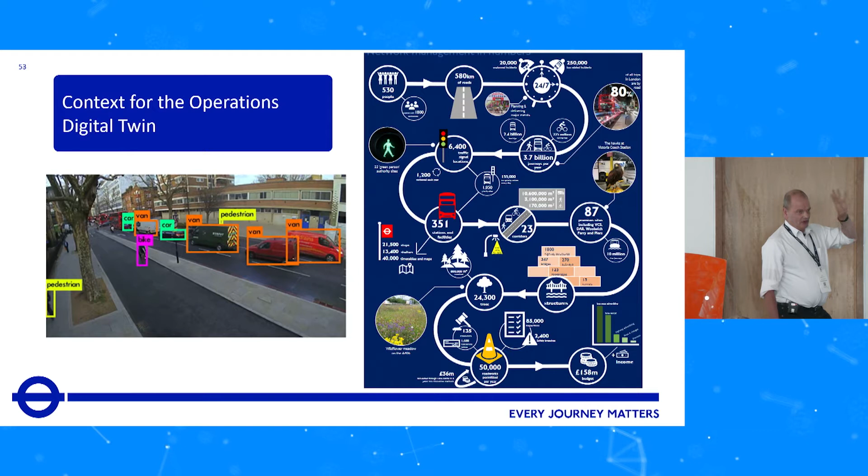Everything from managing every bit of the assets, to running the bus service on it, to managing 50,000 roadworks a year, to managing 3.7 billion road trips by different modes. And what we do in Transport for London in Surface is we manage every single element of that, from managing the 6,400 traffic light signals, which are fully automated and regulate most of the activity on the network, right through to managing all the assets and everything that goes into making the roads work.

But there are specific challenges about London's roads that make them truly a complex system. On the left-hand side, we have data. We have poor quality data. Like I said, when I started 18 years ago, there was nothing. In some areas, like monitoring freight movements and pedestrian movements, we still don't have good data. We have poor spatial and temporal coverage. We have a lack of certain types of data. We have poor innovation by suppliers in terms of sensors and new data.

All of these digital AI cameras are brand new. We've only been trialing them for 2 or 3 years. I now have about 150 of them on the network. And there's this whole idea that we understand our outcomes, but we don't necessarily understand what's driving them. How do I bring that information together? That's what's really important. But there are attributes of the network that make this complicated.

London's roads are open. It's not like running the underground or a bus service where you have a schedule or a fixed route. We don't manage demand per se. It's an open network. The road layout is very atypical. Every single road's different in terms of its characteristics, its physical entities, how wide it is, how much capacity it has. And there are constant dynamic changes in the network design and layout. I've estimated that 10% of London's roads have some facet of change associated with them. In other words, either there's some element of redesign, resurfacing, or some elements of control are changed on that part of the network.

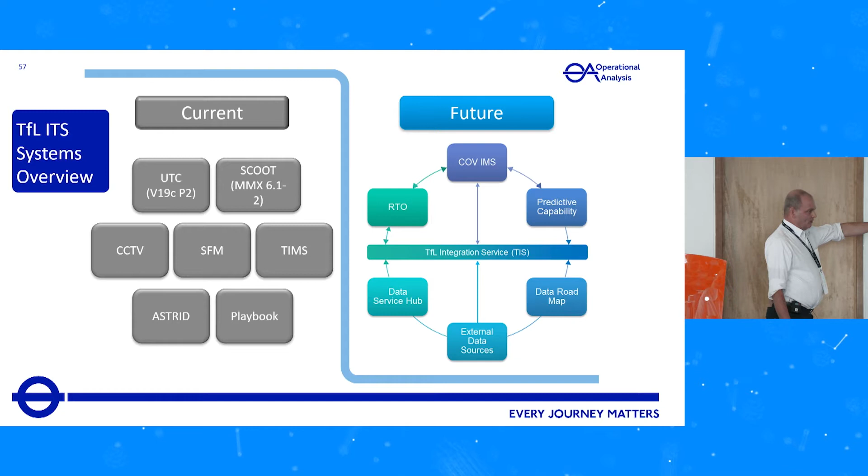We're replacing all the signal system, which is what RTO is, real-time optimizer. That signal system now will be truly multimodal. We are producing a common operational view of the road network. This is the decision support system the controllers will use for their information to manage the network. And then we're building a predictive capability module, which will take a snapshot of the road network, run it against traffic models in faster than real time, and come up with mitigation measures.

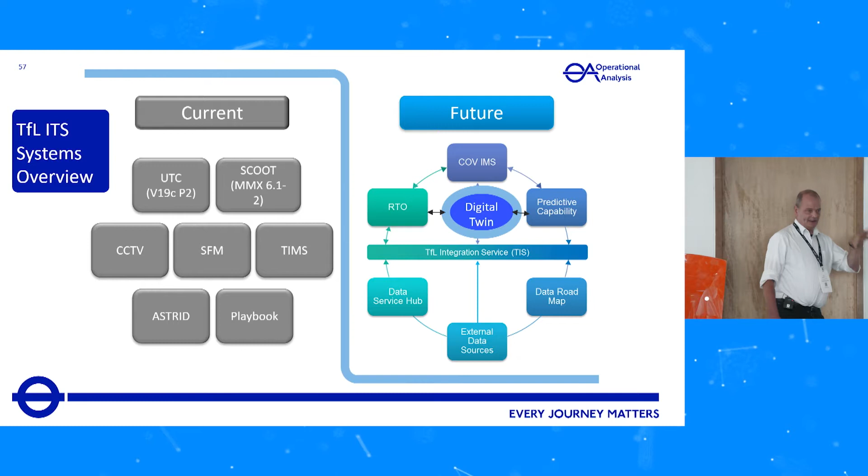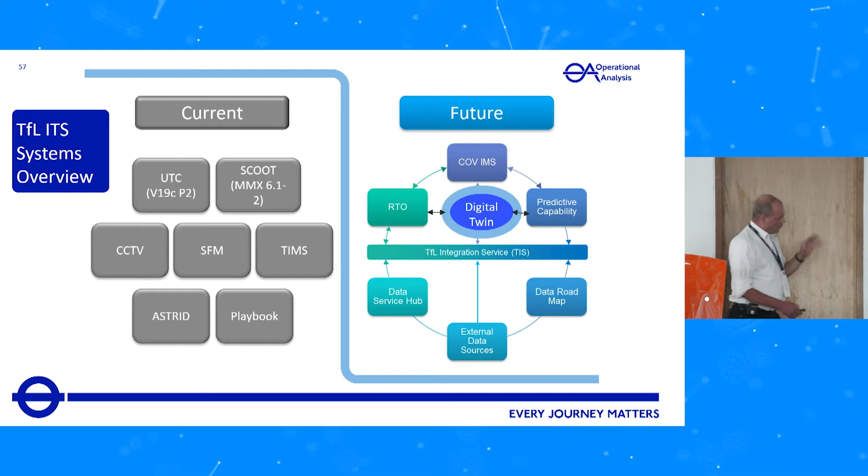So that's our road map, but what underpins it? You need a coherent single set of all the data to tell that one vision of the truth. And that is the digital twin that I'm about to demonstrate. This proof of concept will become the operating model, the decision support system for our technology program.

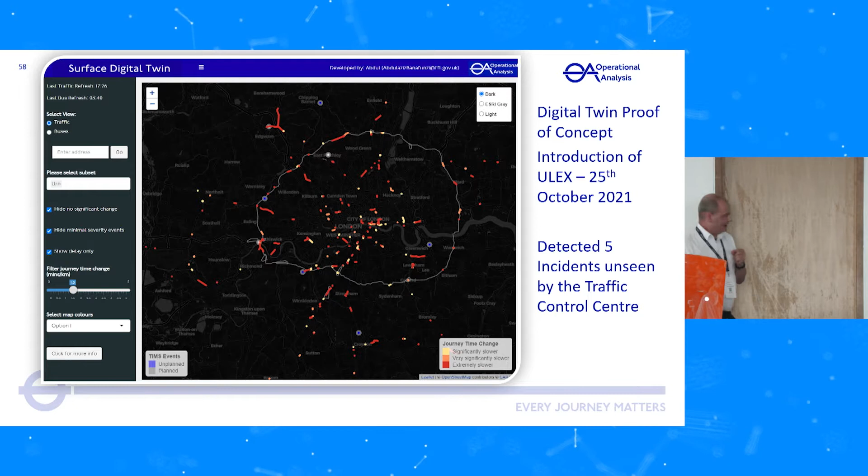So this is a snapshot of the digital twin that I built. I'm going to take you through a video of this, but this single slide shows it was utilized in anger when we had the implementation of the ultra low emission zone inside the outer ring road. This went live on October 25th last year, and I built this tool for the signal engineers to understand when there was an incident on the network.

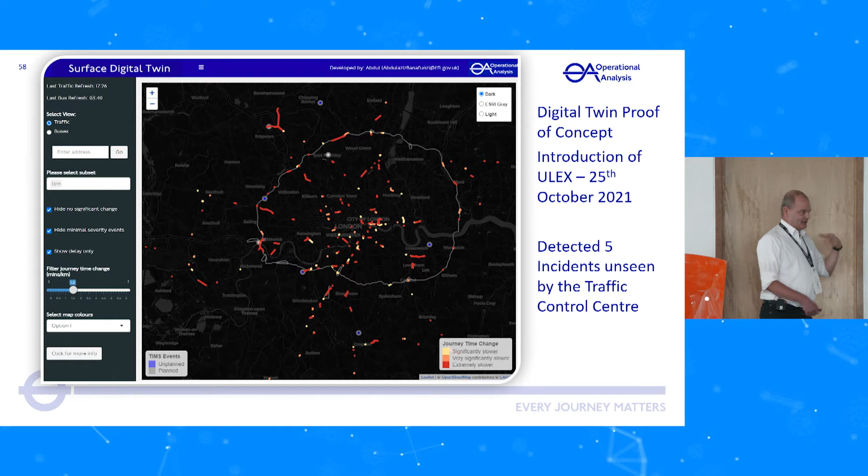You can't quite see here, but there are some defined areas like Chalker's Corner they were very concerned about. Some other areas specifically, if we had overlaps in those areas, they would act on this information instantaneously and switch the signals and switch the signal plans as this information came to light in literally minutes.

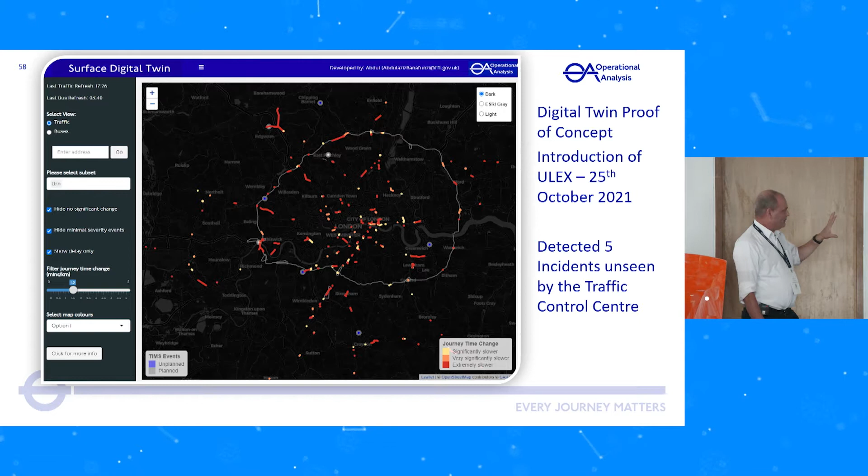The good thing about this is the proof of concept detected 5 incidents on that particular morning that the control center didn't pick up. They use eyes on the network, CCTV, and typically there's a 15-minute lag in detecting incidents on the road network, and we did this in minutes.

So I'm just going to play a video here, which I'm going to talk over. So this is the digital twin. We can see up here in the top left, it gives you information about its refresh.

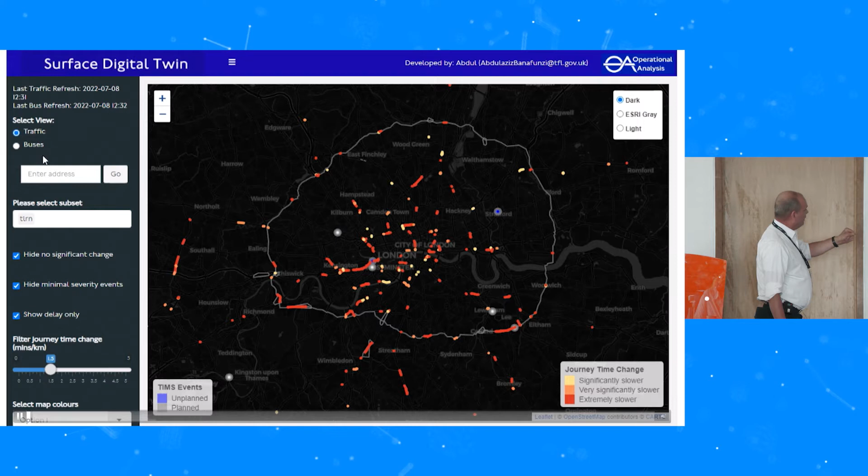At the moment, what we're doing is bringing through journey time information both for traffic and buses. This is basically relative to a baseline just before the ULEZ zone went live, telling me where there is disruption on the road network. The red means something in terms of the amount of delay I'm seeing relative to before it went live. I can drill into different areas of this tool.

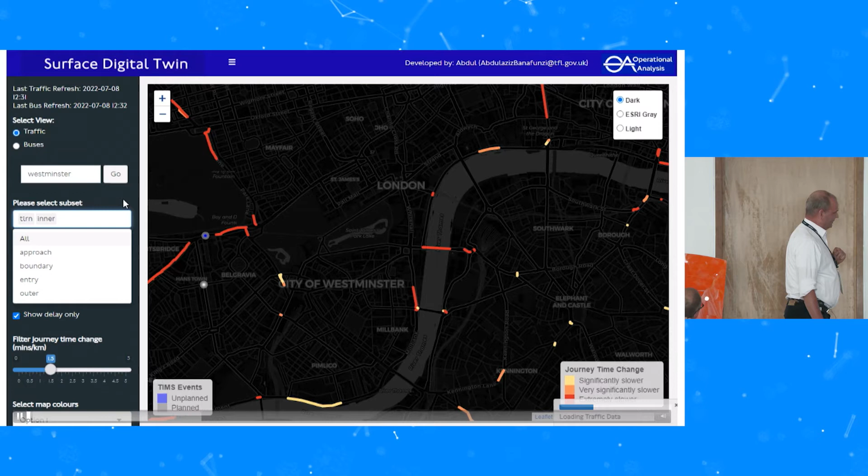Here I'm looking at Westminster. So we have the ability to focus in. We're just taking a cut of the data for the inner zone. You can see the blue bar at the bottom is telling me that data is refreshing as I'm pulling this through. And then we have lots of contextual information.

I can run over this link and I can see in real time what's happening there in terms of absolute change, the difference in journey time, giving me some absolute sense of where I'm at in the network and whether I need to take an action.

So we've got here what my journey time deviation is, sort of all the contextual information the signal engineer needs in real time. And one of the things we're effectively doing is constantly comparing buses relative to general traffic, because our job here is to protect bus services.

And here I can see the route numbers, and differently here, I can see their deviation to the actual schedule time in real time. How slow is that relative to when the bus said it would be here?

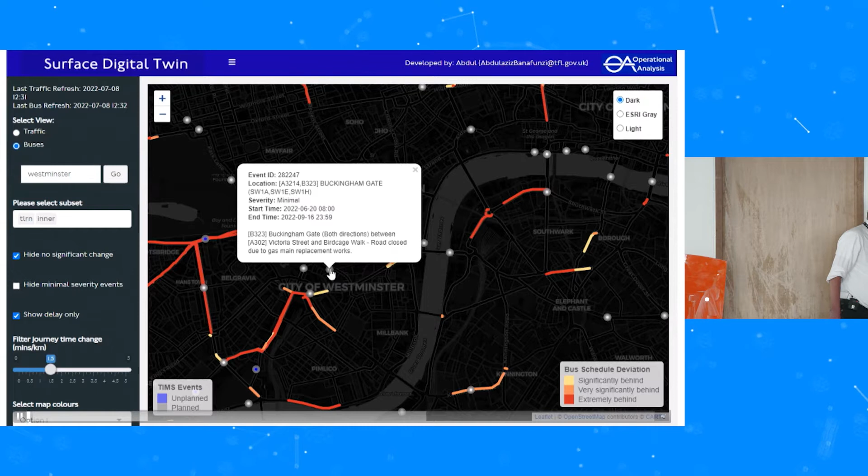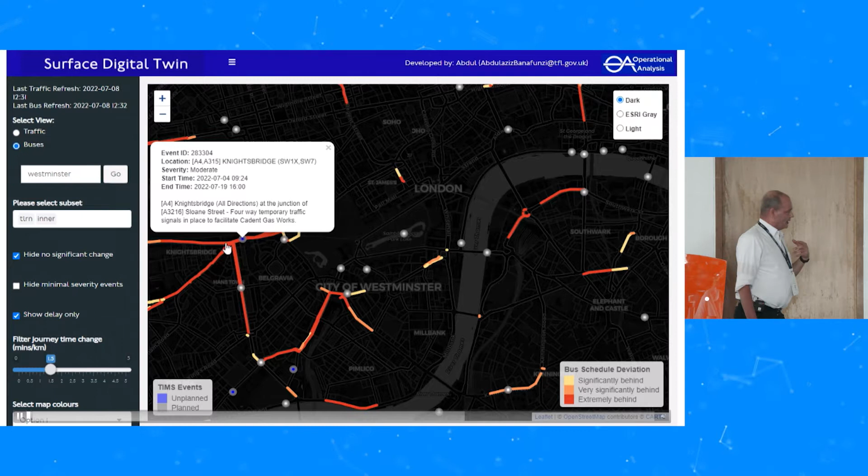I can bring up information on what's being recorded live in the control center. I have contextual information on all the incidents. I can see here that we have gas replacement works on the go. Here we have 4-way traffic signals operating at that moment in time. So I can begin to bring up lots and lots of contextual information.

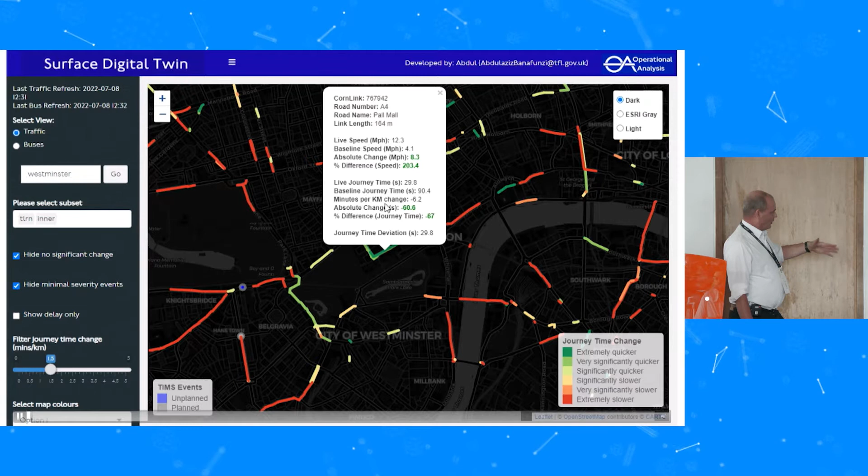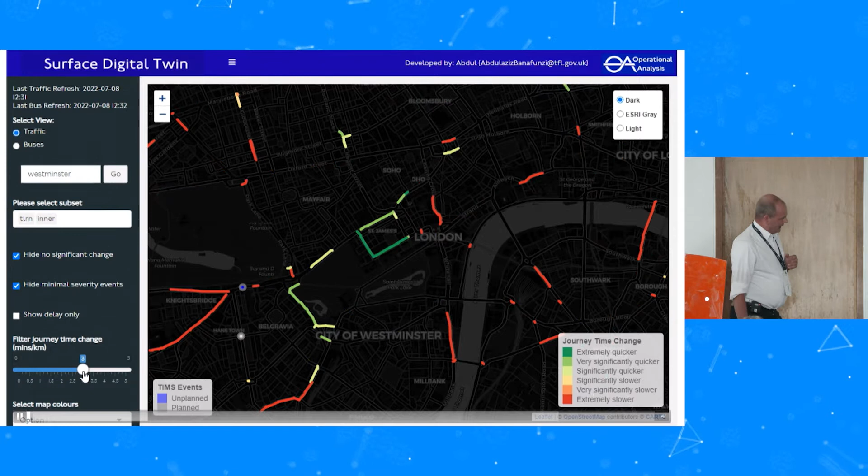I can also see the flip side, the very delayed part of the network. I can actually see where I've got spare capacity. So all I've done here is, instead of focusing on where I've got congestion, I'm actually focusing on where the journey times are flowing quite freely. Is there something here that I might use in terms of being able to reroute traffic? Do I have some parts of the road that are more free-flowing, for example?

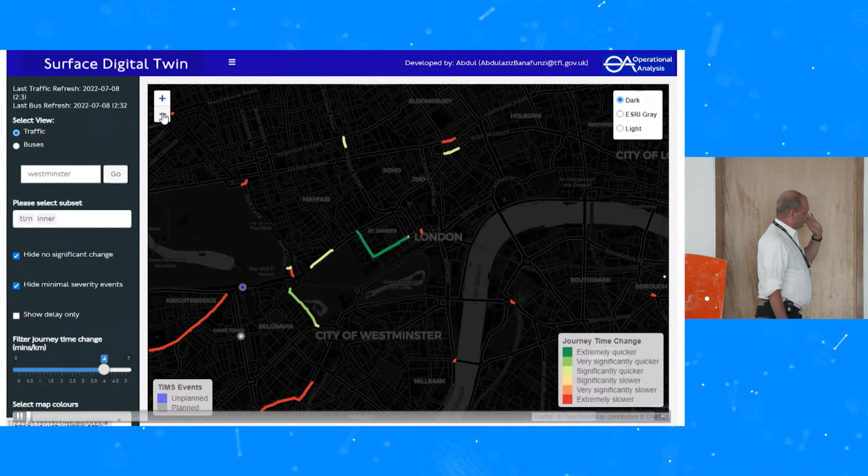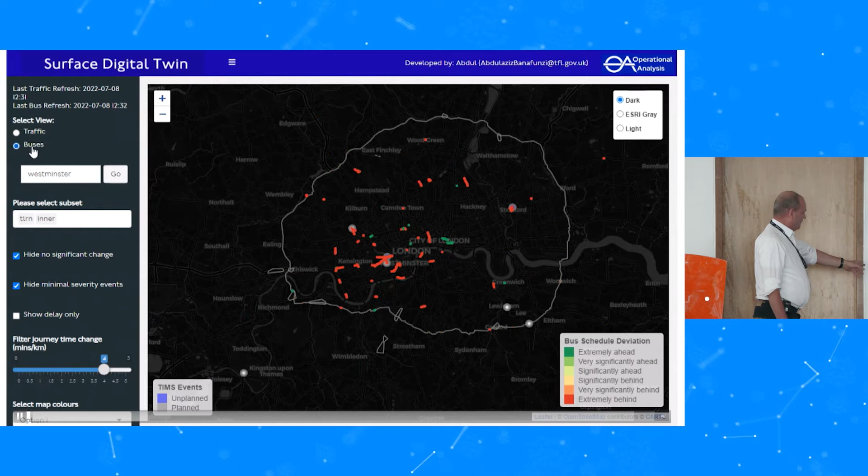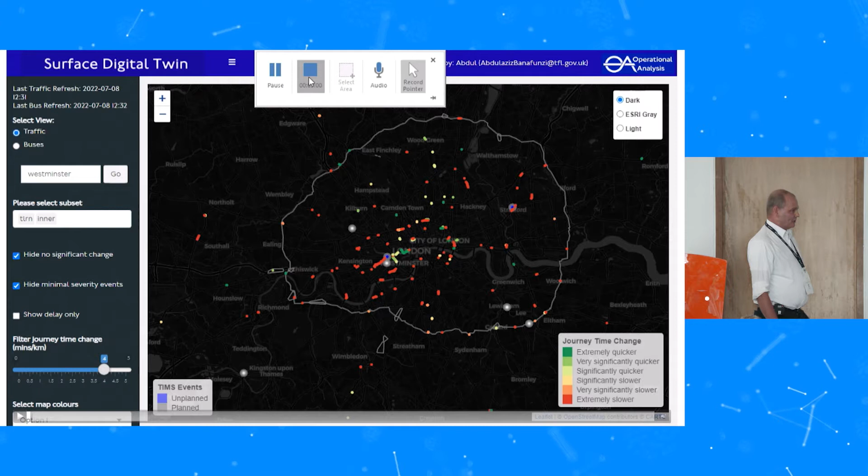The way this works in principle is it works on the basis of thresholds. Basically, there's a percentage difference on the amount of journey time in these links relative to the baseline. But one of the things I can do is filter this journey time by using and changing this threshold at the bottom. What that does is allow the operator to focus on the bits that are absolutely critical, to get a full overview of the journey times on the network, but also to focus on a threshold of what's important to manage.

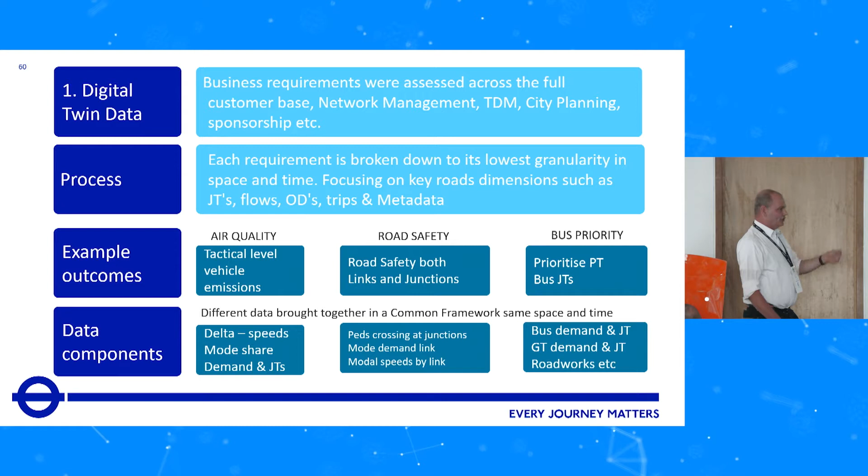So for example, concentrating on the one under air quality, my boss wants to know emissions - how much emissions are coming out from vehicles. Air quality is a more complex thing than emissions - it's emissions plus what else is happening in the environment and weather. But essentially, if I can provide him a level or a map of where the emissions are, he can do things with signal control to manage where those emissions are happening.

What I need to know is acceleration, deceleration profiles at the 1 second level. I need to know the mode share, and something about the demand on that link and the journey times. What I'm doing is saying, what's the lowest level of granularity I need to hold in that digital twin to answer this problem? At what scale, and also geographically, what scale as well.

And then I break all my problems down like that. Is it a link problem? Is it a link or junction problem? What level of data do I need? And so it's about reassembling that data.

So what data do I have in my digital twin currently? We have the general traffic journey time data, which is what I was illustrating in that demo. I have the bus journey time data. We can compare and contrast how successfully we're managing one against the other. We have this mission to protect and make sure the buses are running smoothly against their network.

I understand the signal patterns. We have quarter-second detail coming off of our SCOOT system, which tells me something about flows and congestion. I have information on roadworks and incidents. And this is all in real time.

So think of the digital twin as a processing engine in real time, but I also can archive this off. So I have all this historical data. We tend to aggregate it to the 5-minute level, and we aggregate it over 60,000 links across London's roads. I've got 30-odd billion rows. It's about 150 terabytes of data at the moment. So it's fairly big data that we're working with here.

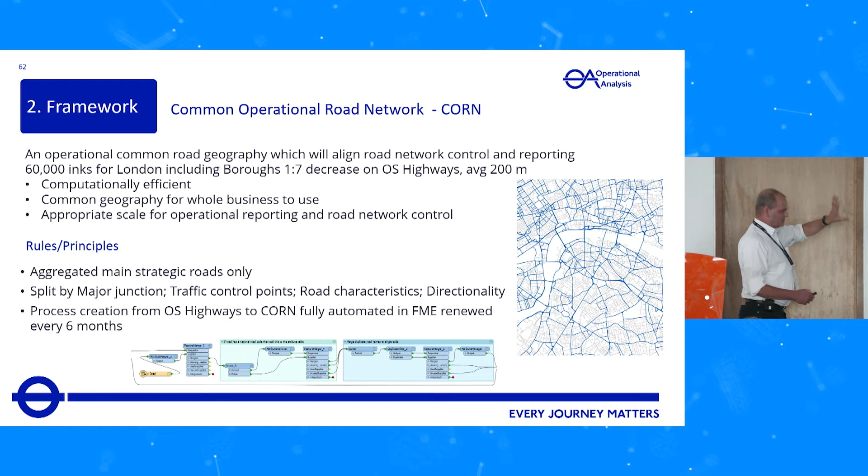But frameworks are really, really important. You need to think about how your business requirements are processed, and what's the value of the framework? It's alignment - it brings together all this disparate metadata you've got all over the place. I've got 240 different layers that describe the road network, everything from where the asset is to where the bus stops are. The framework aligns the data. It enables you to have an output function, and those output functions deliver business needs.

The key then is to align your graph database to your framework and model the road network. So I include all my contextual metadata, I can map all the key relationships, and then I have this virtual model of what's actually happening out there.

So each of the 60,000 links I've talked about in my framework is identified by a node. In this graph database, that node knows everything about my metadata, everything about what's connected to that node. But the smart thing is that node also knows how it relates within the network to the node next to it - it understands what patterns you need to follow to get from one node to another, or to go through the network.

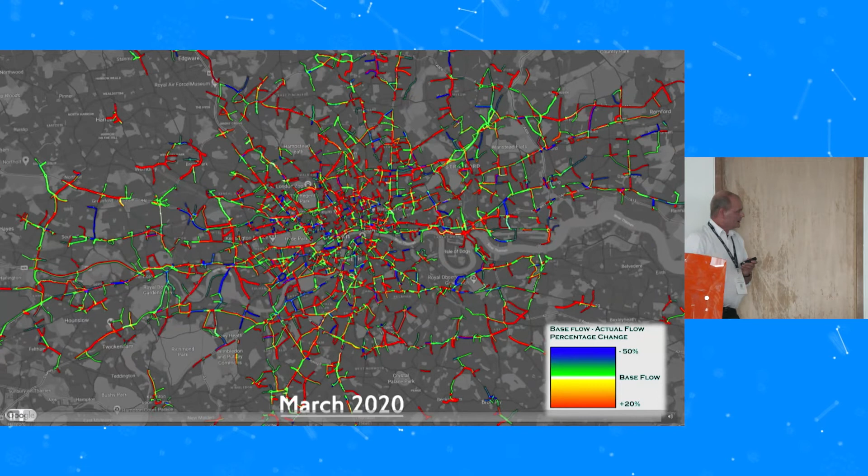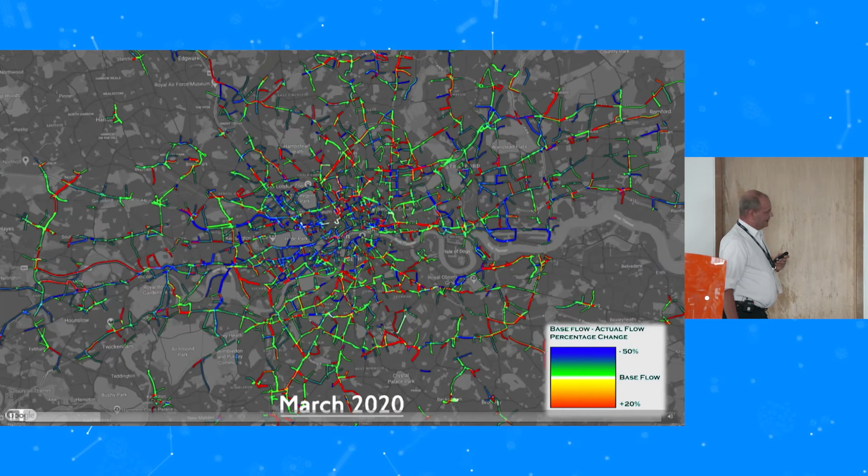What I have here is another video. This basically tells you something about the importance of actually having data in a way that visualizes it. What this video did was look at changes in flow as detected by our traffic signal system just prior to when COVID hit, and then we can see what the impact of COVID was on flows on this network. So here you can see I have reasonable flow levels across most of London, and then about March the 15th, we begin to see a bit of blue, and when we get into deep blue, traffic levels have fallen 50%. And that was the impact of that first wave of COVID.

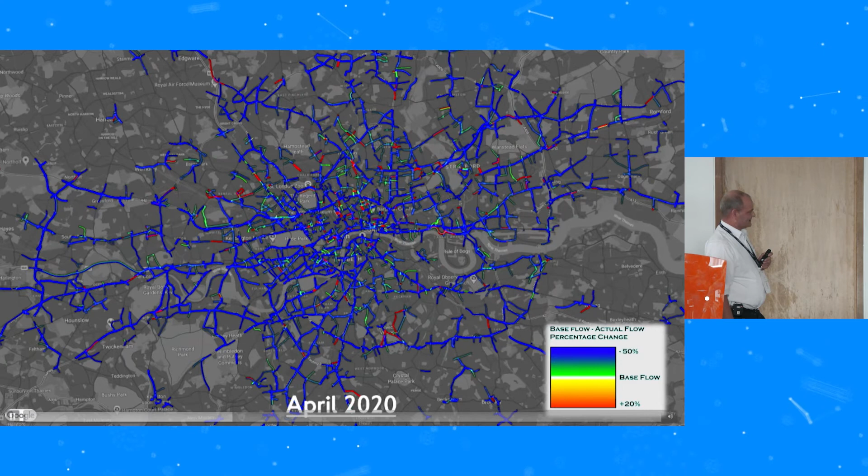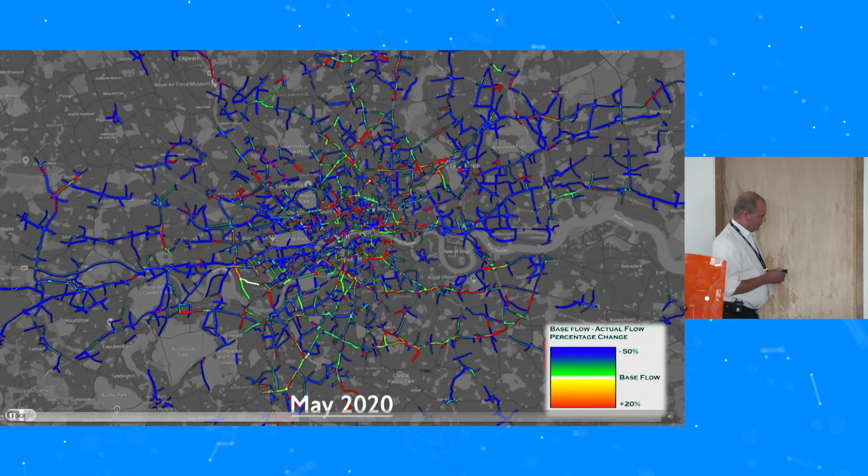And just being able to visualize that, and then coming out the other side, through these visual sweeps in time, we can begin to understand how the road network began to recover. But this is the idea of being able to play visualization with your data and being able to understand what happened on the road network. So as we come into May, the network's beginning to recover.

The 5th layer in my digital twin is this idea about how can I get it to do a lot of work given that I have so many contexts to answer. I have to answer the context of measuring emissions. I have to manage the context of situational awareness. And there are so many things, so many rich things that can be done with this underlying data set. There's so much metadata there.

So we came up with this idea of a modular design that allows for partitioning of the workload. The graph database and the underlying digital twin are doing the real-time processing and the preparation of the information, but where you need to do further work and develop algorithms and apply those algorithms can be done in the plug-and-play unit. So we've basically done some work on a proof of concept for air quality emissions.

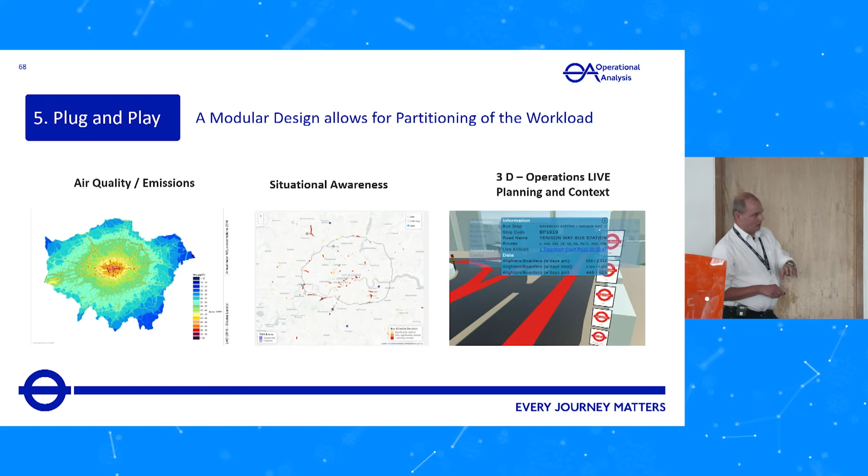We've basically developed this idea of working out these 1-second intervals of acceleration deceleration profiles on links. That information goes into a PHEM model. That PHEM model, which is just an acronym for a model that basically produces the emission outputs, then produces a map like this, and that's done in a separate layer. The situational awareness is something that I demonstrated to you earlier. That was the digital twin itself.

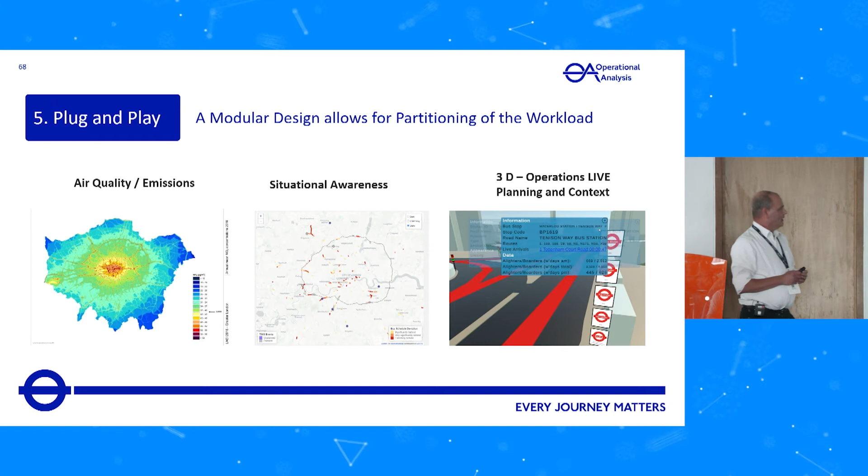And then there's also this idea that's been developed in our modeling team of an operations live planning tool. Again, our customers need to understand what's happening. We have this idea that we can use an Oculus, we can get people to understand the layout of the digital network by providing 3D visualizations of the network based on our underlying traffic models.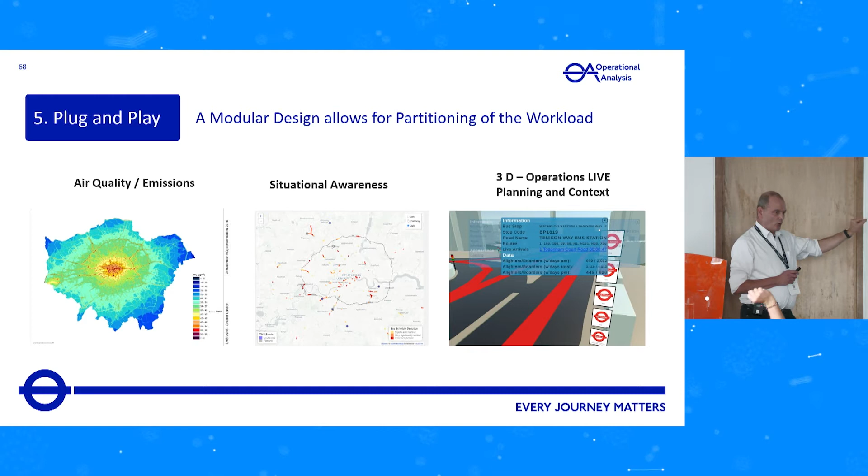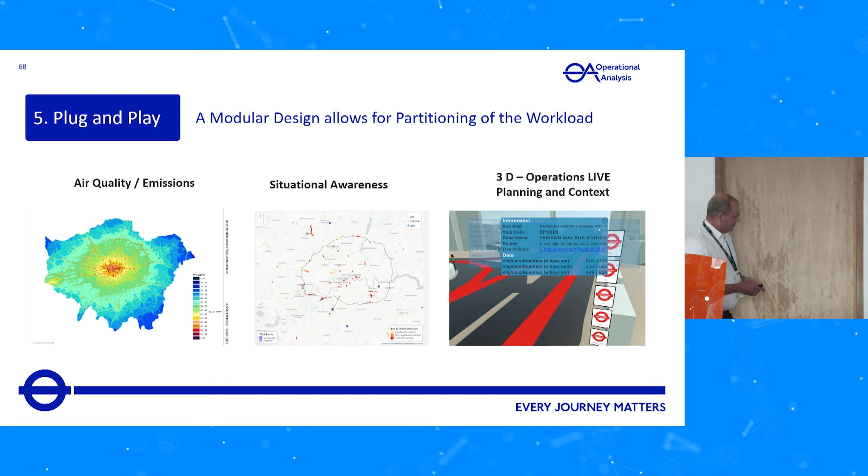But what this tool is doing is it's pinching data from our underlying digital twin, and basically providing context for people to go out on the road network and do virtual planning. And I have a video here that takes you through that.

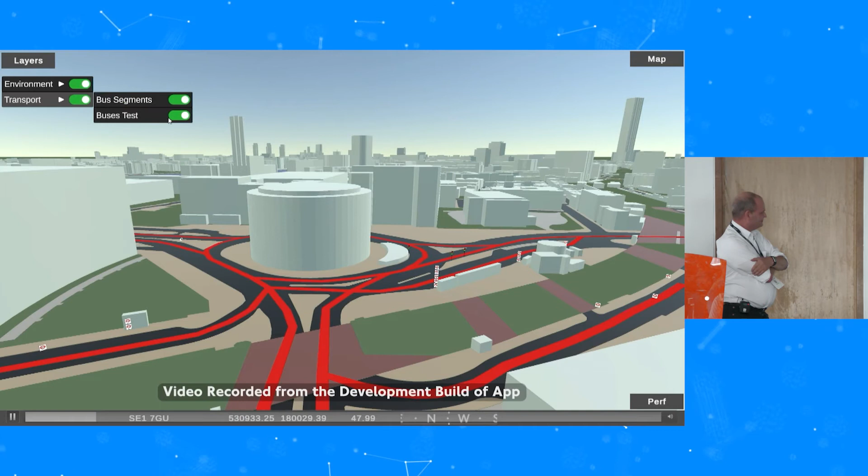When roadworks are carried out on the network, more often than not, a site meeting is required with multiple parties, which can prove difficult to organise with everyone's busy work schedules. That's why TfL have developed Operations Live, which enables everyone to meet in a virtual, real-world environment and provides them with the information they need to make business decisions without the need to meet in person.

The Operations Live app does this by converting traditional 2D datasets into a 3D interactive digital twin of London, which can be accessed via a web browser and used with online meeting technologies. This allows us to gain a greater understanding of our data and how it relates to the real-world surroundings, as well as enhancing communications with our stakeholders by removing the barriers with this type of activity, like organising calendars for large groups, time spent travelling to destinations, risks associated with conducting site meetings, and conveying relevant data to stakeholders with varied areas of responsibility.

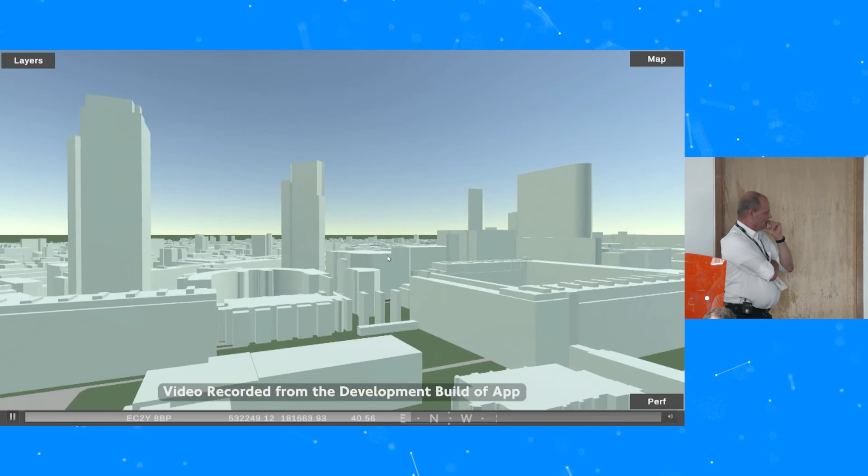Additional datasets are in the process of being added, which include permits, utilities, accidents, Google Street View, jam cams, traffic flows, urban traffic control elements, and many more. Operations Live aims to reduce the requirement for people to attend site when carrying out initial assessments of proposed roadworks, increasing efficiencies within the planning stage, and allowing us and our stakeholders to target the data that matters. This project was made possible by funding received from TfL's Lane Rental Scheme.

So what I want to do now is just talk through what our next steps are. I talked about the development of the digital twin for incident detection. We want to develop the use of the graph technology across the different data sets to provide real-time connectivity and alerts across those data sets. So the thinking here is, if I have an alert driven out of general traffic time, but I also have an alert from the bus journey time and an alert from the SCOOT journey time, I can get them to reference each other, confirm the probability of an alert is higher, and therefore reduce the idea that we have a false alert.